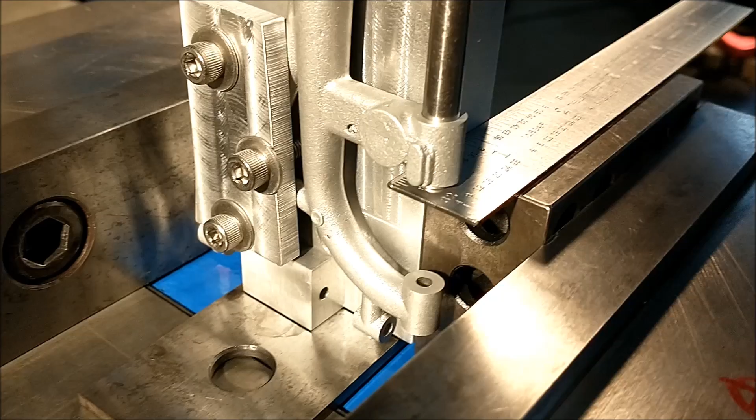Next feature is the keyway cut for the spindle. Using a gauge pin in the hole. Stand it up, indicate the location.

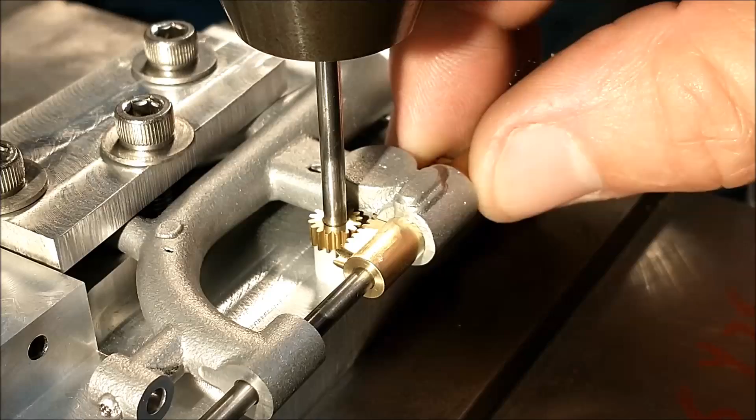Once you've successfully broached out the slot for the rack, this is what we're shooting for. This control gear right here will ultimately sit down inside this casting and be the drive mechanism that raises and lowers the drill or whatever you have in there. This way.

What I'm doing now is by actually using the gear and advancing the table, which moves the piece that way, we can adjust the backlash on this particular gear. I'm going to set the digital at 0, and you can see the amount of backlash that is currently present. That is a 1/10 of a millimeter movement, 3.5 thousandths.

I'm just going to keep tapping it in until I like what I see. Then I will rotate the gear up, rotate it, and put it back in, just to make sure that the bore is concentric to the PD and I'm not going to have a tight spot somewhere. Some backlash is good, but you don't want too much. You never know.

Now, I would have to say, of all the features on this that may not visually align for you, this is going to be it. You want this to be functional above all else. Top to bottom, vertically, this can align fairly well because it's done by eye. But as far as the front to rear is concerned, that's driven by how this is formed, how the casting is oriented. So if this doesn't line up, don't let it break your heart.

I'm sure mine will be off somewhat. And there's also a boss on the underside that is, you're at the mercy of the universe on that one. So we'll have to see how that looks when I take it out. And it's not coming out until all of this work is done. So let's ream it, move on.

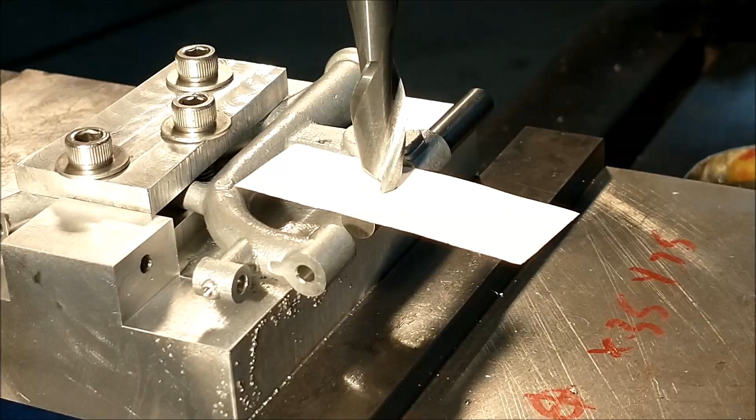Got the center of the cutter on the center of the pin. I am coming up with the table ever so slightly. And believe it or not, you can do the table with your leg if you position the handle correctly. Just lean on it with your knee. I've always thought that's why they call it a knee mill, because you can raise the table with your knee if you don't have three hands.

And I know somebody's probably going to say it, but I'm going to beat you to it. If you know that you're already 125 above center, well, you can just do the calculations for the flats that you want to go to. But I'm just going to go from a true zero and drop the table.

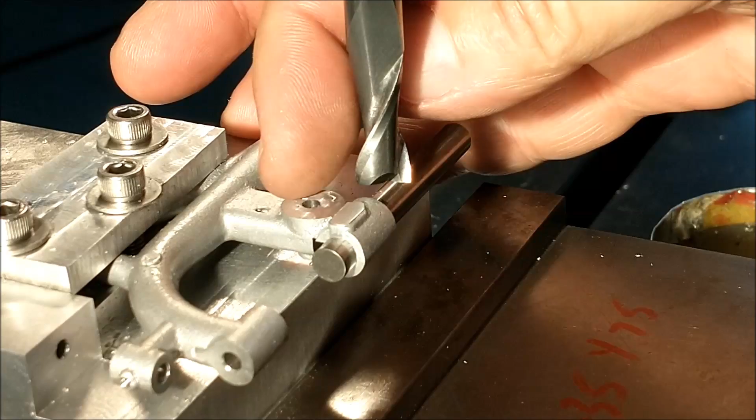See some porosity showing through on the finished surface there. I stayed clear of the boss with the exception of taking the top. And the cutter does need to come up to do the top of that, so be careful not to deck the whole thing off and shoot yourself in the foot. I'm going to move back over to my 0-0 position and plunge a counterbore down here to clear the gear. Then I can actually test the gear to see if it worked out.

Space permitting, I will make this counterbore a little bit deeper so I can put a Delrin shim under that gear to avoid the metal-to-metal contact that I'm so passionate about eliminating. Kill that for you. There you go. 250 deep, 6 millimeters.

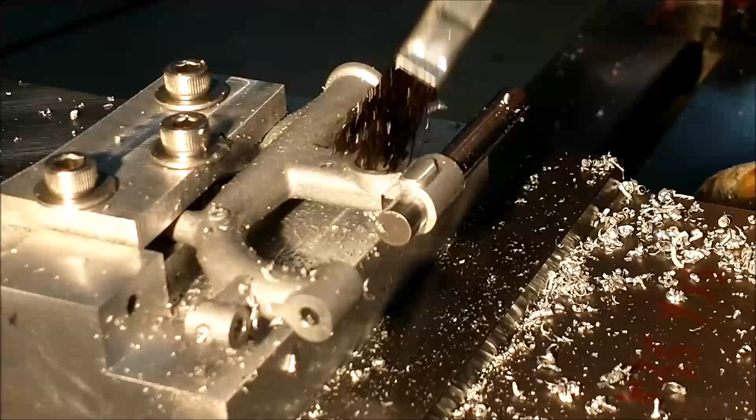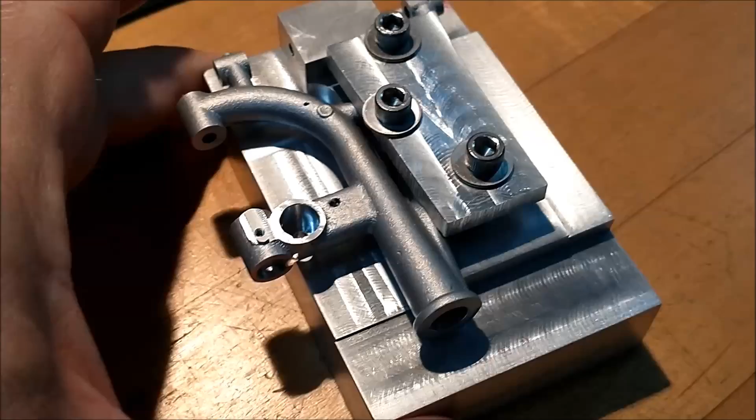Pull the fixture out of the machine, let's take a quick look at the alignment and concentricity of everything and such. I like the concentricity of the spindle journals. The top one is about as dead on as you're going to get.

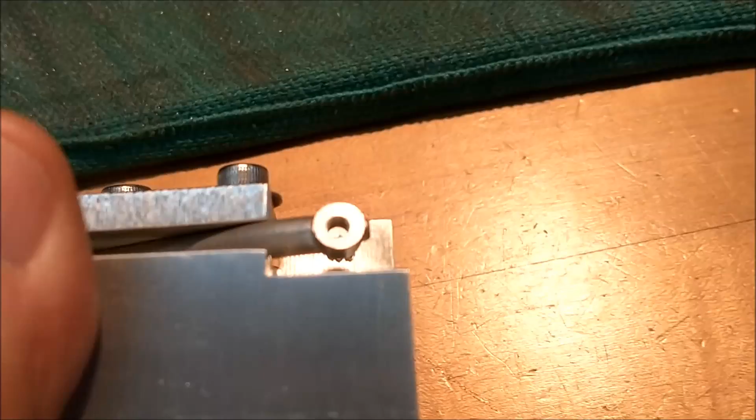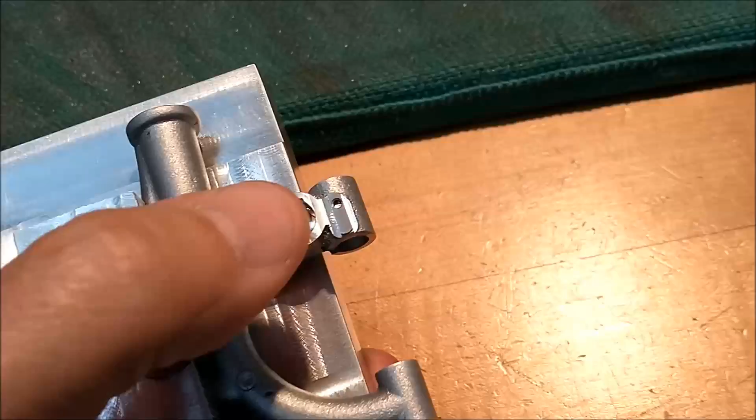These guys here are acceptable. I would say that the front is probably closer than the back, but you got to draw the line somewhere, because if you try to center this one up, then this one back here jumps out of whack and such. So figure out what's important to you and stick with it.

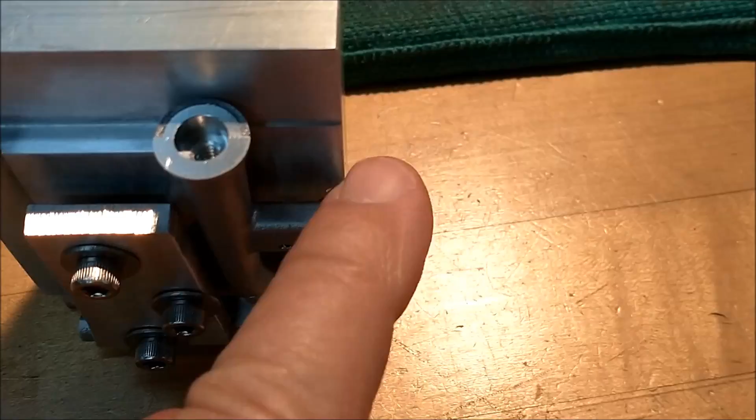My alignment for offsetting these two guys seem to work very well and bring in the top two as well. But flip side is somewhat of an eccentric relationship here. Left to right you can control, that can be done by eye. And a lot of what you're seeing here is reflection. So left to right is very close, but you can see front to rear has stepped back.

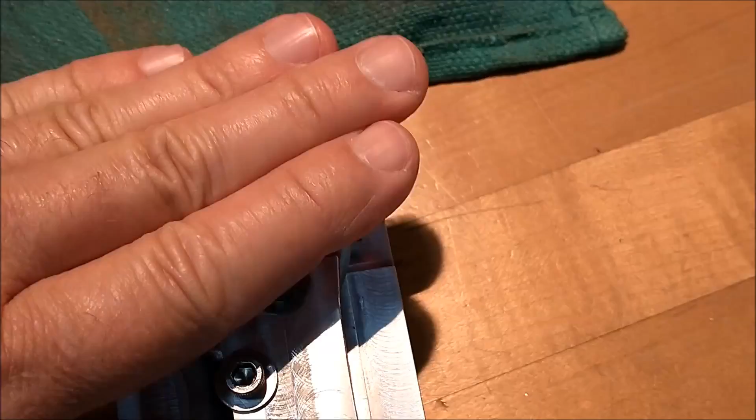The only way to correct that, the only way to center that would be to have the forging or the casting shifted. If it were to shift, you'd lose concentricity here, and this hole would go to the low side because it would pivot up. So you would lose your concentricity back here. This is a real balancing act. This piece is a whole lot more technical than I had initially thought.

Yes, it has voids. I will figure out what to use. Before you leave a comment on what to stick in there, review the comments, because I'm sure there's going to be about 7,000 comments that say 5 different things.

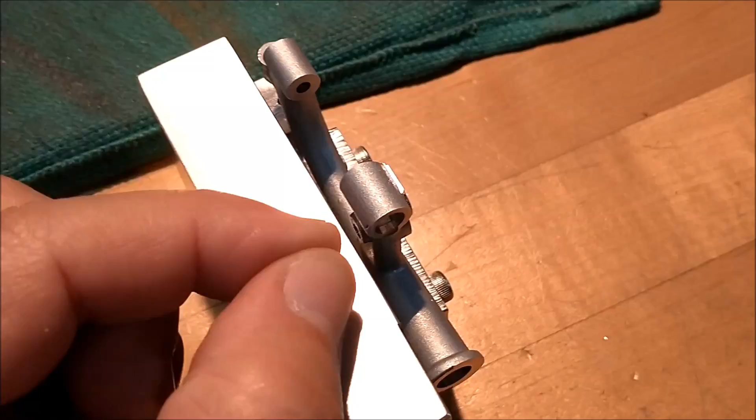This little feature right here is for a hook that has the handle. It's a handle rest for whatever. I don't know if you take the handle off and put it on there while you use the power feed or whatever. Because one side of this has a big handle on it that you saw me make before, and the other side of this has a wheel that drives it down using the internal gear in there. So there's 2 gears here. There's one inside buried for the rack, and there's one on the outside for the handle.

Before I take this out of the fixture, I'm going to spot face this and put the hole in there that will ultimately hold a hook for the handle. And I'm going to confirm and reestablish that the oiler buttons on top are on the same plane. That way, if I ever have to put this thing back in, I can use those 2 small surfaces as a reference to square this up quickly. Not a bad idea.

And that would be just about all there is left to do. So I'm going to dust these off, pop a hole in that off camera. It's going to be boring, but I'll do it. And as far as this is concerned, I know somebody's going to comment that the casting didn't clean up. And you're absolutely right, the casting did not clean up.

But let's jump down the line a little bit here. This is not going to be left in a square format like it is. I'm going to make a bead out of that. I'm going to put a large radius on that other corner so it looks like a bead in between the brass column and the upper frame. So that should be consumed by the radius I'm going to stick on there.

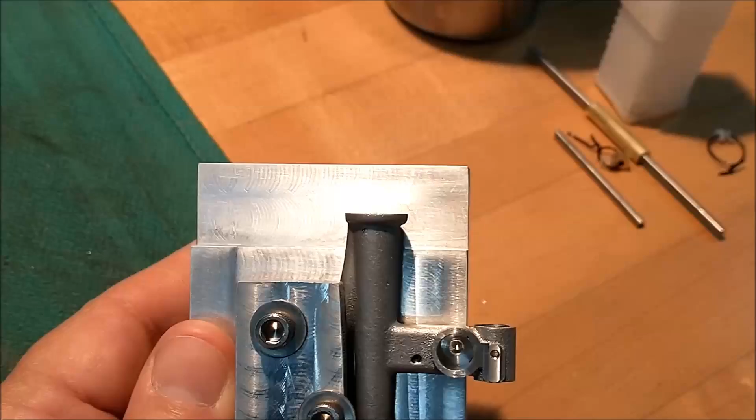Should be. If not, then well, I'll just take a dust cut off of that, clean it up, and add whatever I pull off the bottom here to the column. Problem solved. The overall stack height will be the same. That would be considered an assembly level dimension, which is awesome. So if you're an engineer, don't have 15 things held within a micron. Put a stack dimension on it and hold the very last piece. Simple. All right. Let me wrap that up real quick. We'll pop it out, turn it over to the back side.

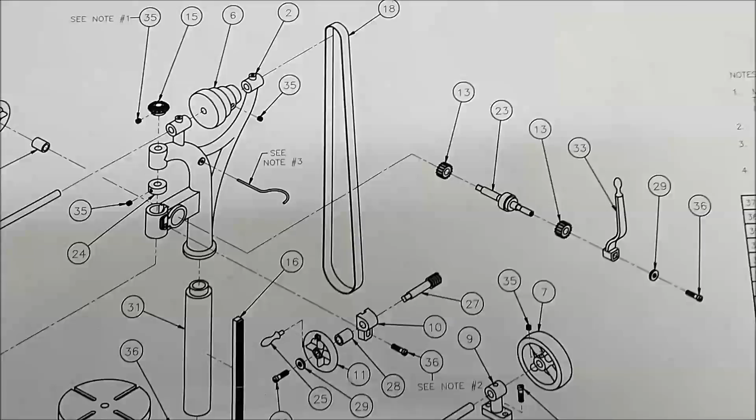Next piece in line this morning is part number 23. That is the spindle feed shaft. This guy right here. Now this is an extremely clever design. Got a gear pressed on both sides, and this whole mechanism feeds through the whole counterbore that I just put in the frame.

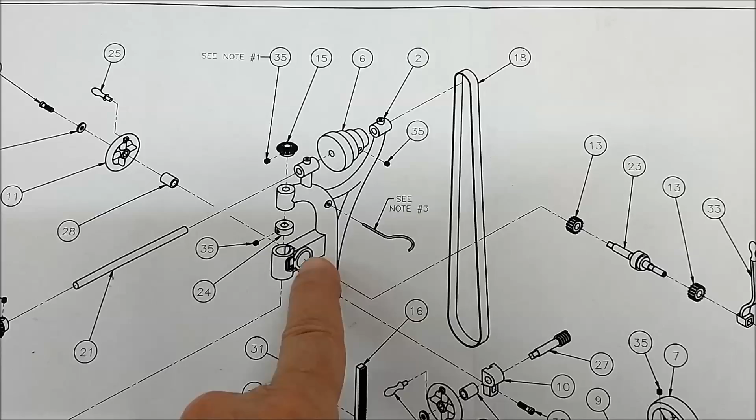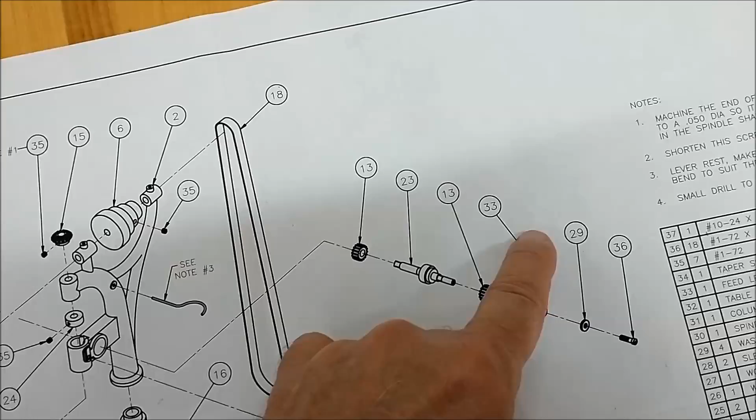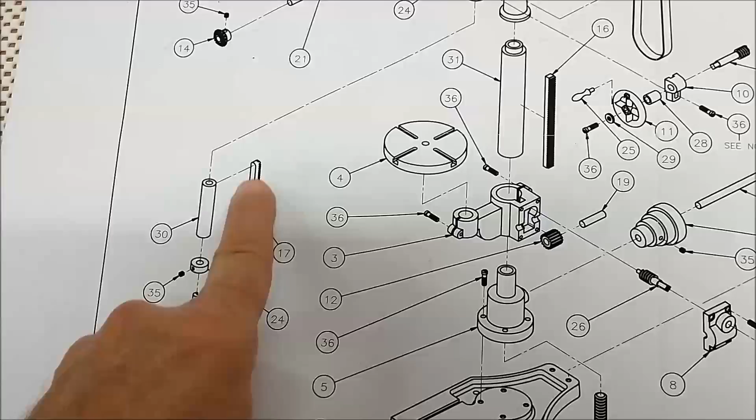3 different handles get connected to this. You have one large handle on the outside, which is a direct feed. A lot of torque, a lot of mechanical advantage, and it's direct. If you turn this 90 degrees, that gear turns 90 degrees. Therefore, you get a lot of motion on the controlling rack driving the spindle up and down. First option.

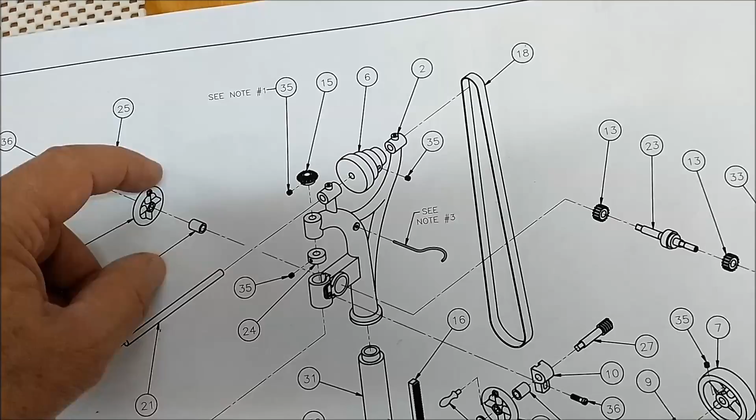Second option is the hand wheel in the back. As you turn the hand wheel 1 complete revolution, you will get 1 complete revolution of this gear, translating to the same distance here, but maybe a little quicker.

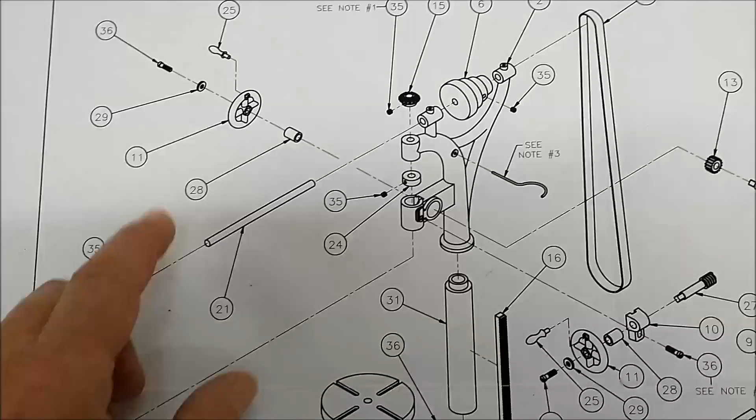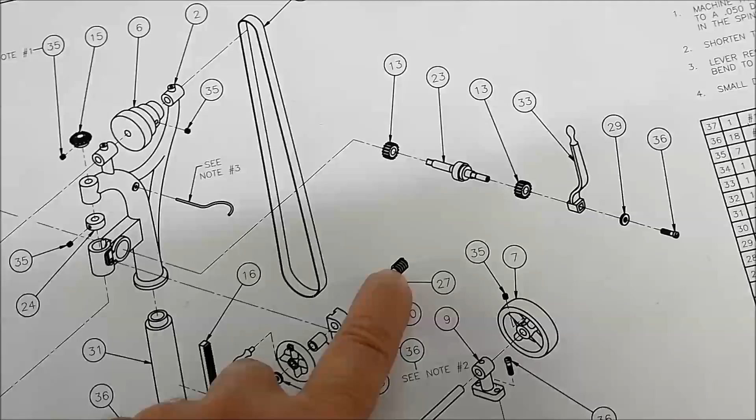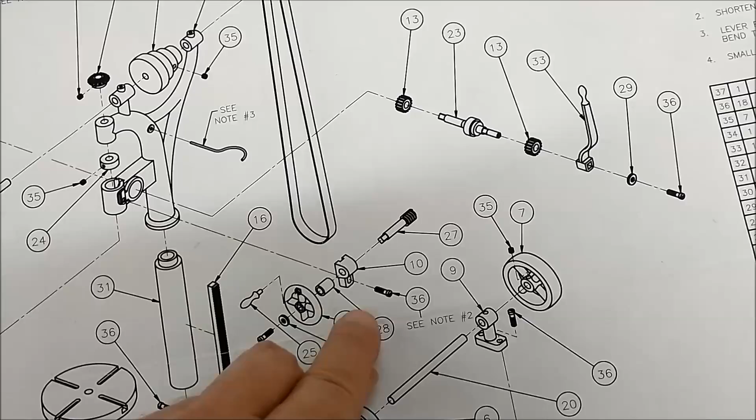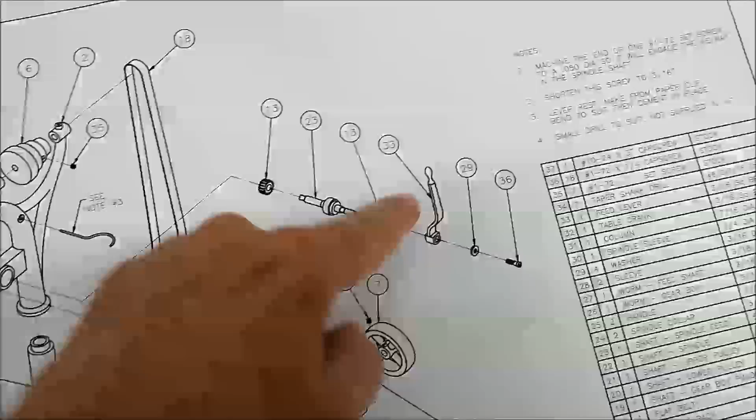All right, so you got speed, you have torque, and on the front half, this mechanical system right here is another worm gear. 1 revolution of the front handle will give you 1 tooth advance on this. So this is an extremely fine mechanism here. This is also slotted so it can be moved up out of the way and not have to be engaged at all times. Speed, torque, fine feed. Clever, really clever, I like it.

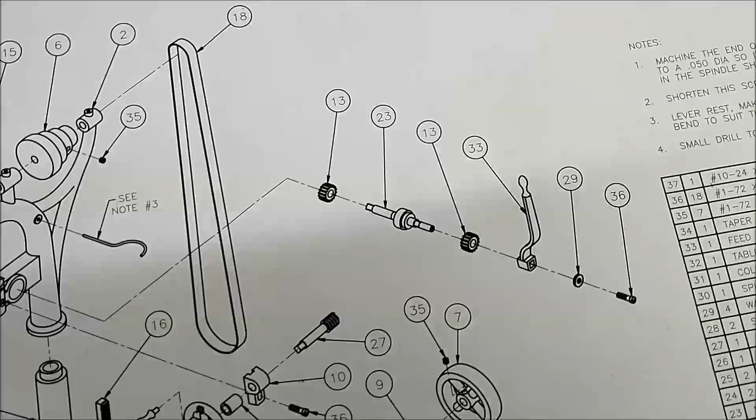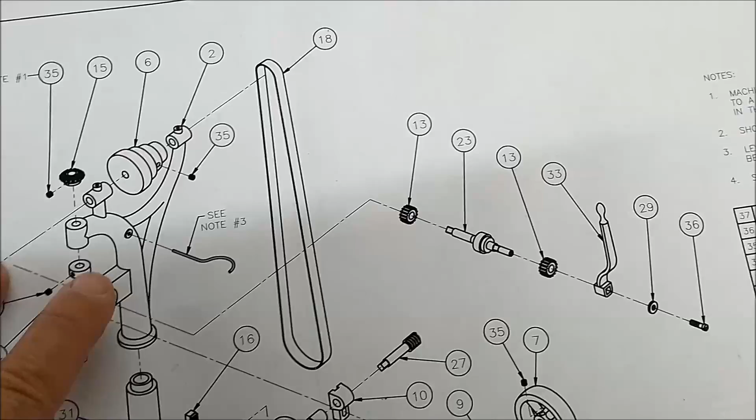The only prerequisites for this part, that this 125, 124 diameter pass through the small hole in the back of the counterbore, and the large diameter must fit in here comfortably to give it the 2 points of reference so that it sits still and doesn't flop around when you engage it. Just grab a piece of material, put it in the collet, get after it.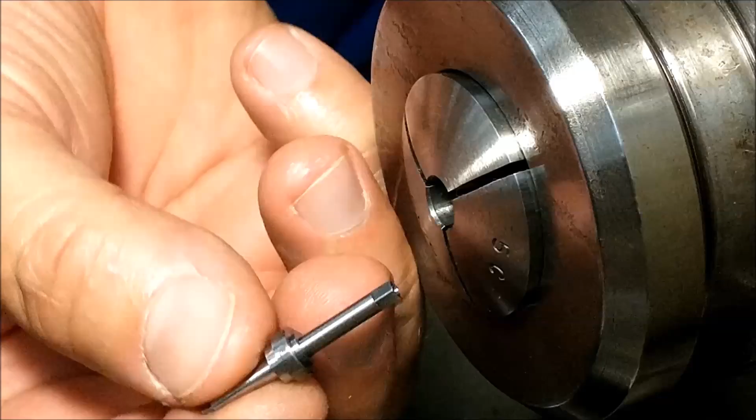Anytime you reverse turn anything that's a small diameter to a small diameter and you chuck or grip or collet on the other end, you can be assured that you're probably going to get the best concentricity, but you're probably going to get a little bit more chance of this deflecting as well. I'm going to hold it on the smaller diameter, and I'm just going to intentionally throw this in here crooked. Let's see if I can do that. Just to illustrate a point. See the run out, I hope.

When gripping on a small diameter like that, you really have no linear point of reference. So by oscillating the part, move the part around as you draw the collet closed. You'll feel little ticks, little gentle ticks. Make sure you move your fingers in a circular motion. When you have it locked down and there's no more ticks, let's see if it runs truer this time.

Much better. Third option is to keep it running while you're closing it, while you're floating it in. That way you get the best of both worlds and you get the visual immediately. I'm going to go a little higher RPM to do that. This is about 240 RPM.

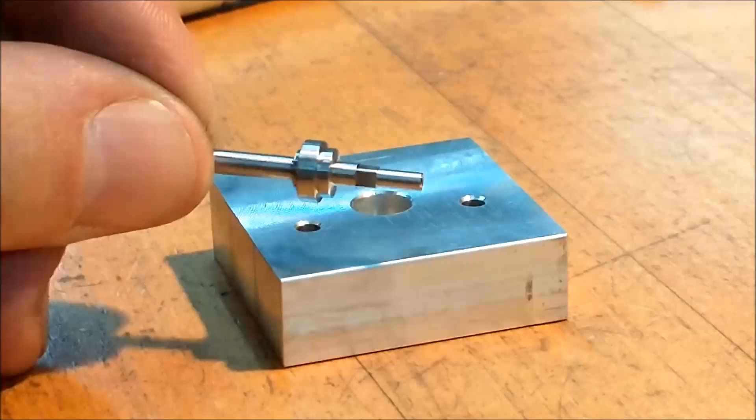Okay, back over to the indexer. Got to put the square on this end, and this part is complete. There you go. And the moment of truth. This is what the part looks like. It is extremely small. Well, not extremely small, but small enough.

Got a square drive on both ends, and we got to put gears right in the middle of the ends. One here and one on the other side of that. They are actually turned larger than the adjoining journals. You can just barely see it in reflection. Be a 1/1000th press fit. Should walk in there pretty easy. Should. Operative word. So gentle tap.

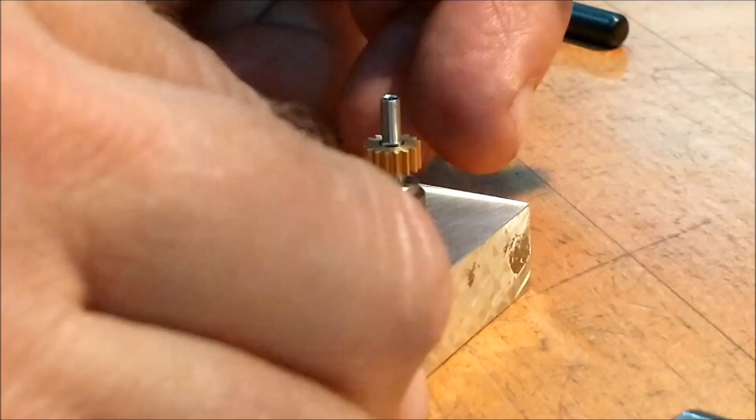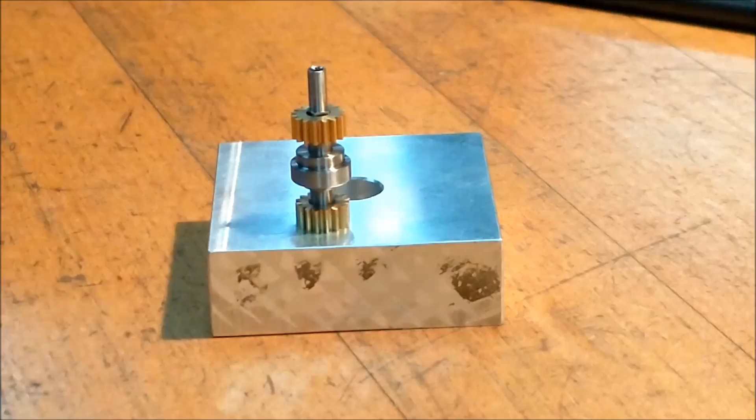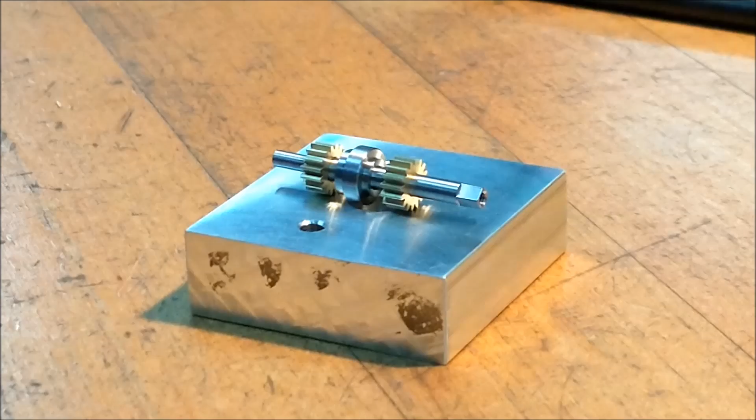Okay, with it started, I am going to put it in my vise, squeeze it end to end, and then we'll try it. There's no relationship between the teeth and the squares on the end of the teeth to each other. Nothing. So if you can get this thing to go together, have at it. Let's move it over to the vise, give it a squeeze. A gentle squeeze.

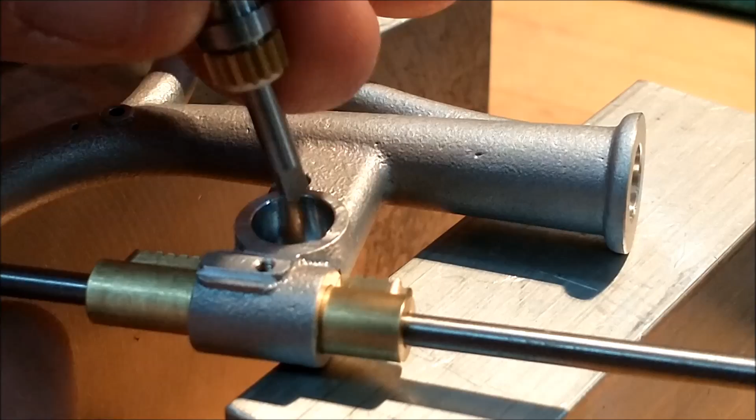This is what the completed subassembly looks like. Gears pressed on. The little Delrin washer is on there that I put in there. This is 20 thou deeper to allow for the thickness of that washer. Let's pop this in there and give it a go. There you go. That's going to be really hard to do without blocking out the light.

I'll give it my best shot, but you can see now when the handle turns, and boy, that is nice and smooth. It'll drive the spindle drive collar up and down. This spindle will be rotating. It'll be trapped on either end of the brass component with a collar with a set screw, so it can continue to rotate while the collar will move it up and down.

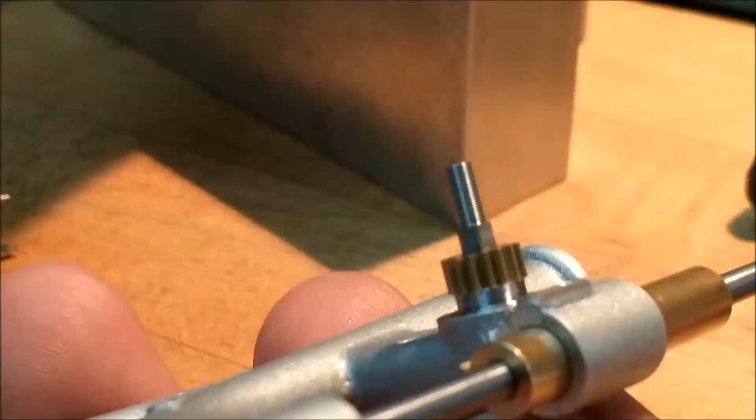And that is quite enough for one episode. I'll make the bushings and the handles and try to get this thing getting a little closer to done. It is very close as it is. And for anyone that wants to see the back side of this, I'll show you. I don't think I'm hiding anything here. The concentricity of the hole to the boss on the back side, you can see where it ended up.

Now, there are several reasons for that, depending on how this thing is positioned in the fixture, depending on how the casting itself was positioned side to side. There's a million different things that could cause that, and you know, it is what it is. When it comes to lining up all of these other features, I nailed it, and if I got to eat one, so be it. It's a win.

I'm going to put a bushing on there with a flange on it, dress it up cosmetically a little bit, but that way you'll know you have an original. If you get one that's off center like this, it's mine. Oh well, it is almost Christmas.

There you go. That's all I got for you. I hope you enjoyed that episode. It was a lot of work to do this one. This was a very delicate little mechanism.